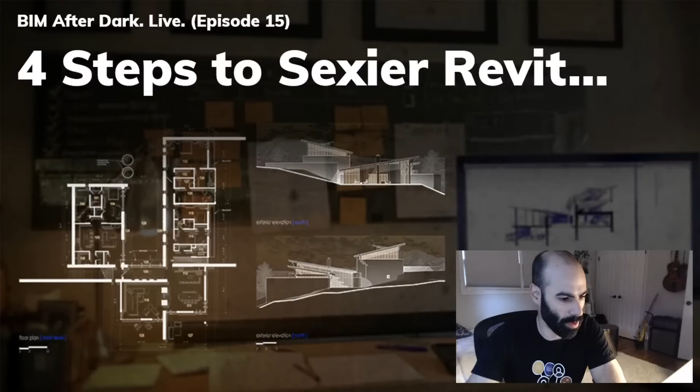So just to run through what we're going to talk about in this session. I have a presentation here, it is laid out, but I urge you guys to ask questions in between. I can flip out and do demonstrations and all kinds of good stuff in between, so don't let that fool you. I just wanted to make sure I prepared the content, and there's some really cool slides in here, so I wanted to show them.

So first I'm going to talk about my journey. One of the more important things, I think, not just with presentations but with Revit itself, is to show people that myself and the gurus out there, those of us teaching Revit, we all started where you are today. If you're a beginner, intermediate, whatever, we've all been there before. It's important to show, through examples or stories, where I was and how it can relate to you, because it makes the level of knowledge or experience obtainable for other people, and it's not like this pie in the sky goal. We all started on the same playing field.

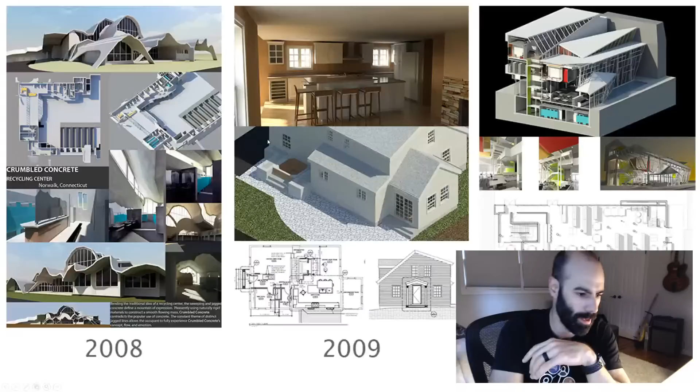Alright, so my head is blocking some of the slide, but that's okay. Maybe I'll make it a little bit smaller so you can see a little better. There we go.

Tuning in from Ontario. What's up, Jeff Davis? Cool, man. Canada, always fun. Always a fun place to be in Canada.

Okay, so here we go. What you see here are a few select projects from when I started learning Revit. Believe it or not, the one all the way on the left-hand side of your screen, labeled 2008, was my very first Revit project for a recycling center at Norwalk Community College. So 12 years ago. It's 2020, so 12 years ago. And what's interesting about this project is not necessarily the renderings.

What you'll notice is that there's a ton of renderings. In 2008, for those of you who are familiar, that's when Revit finally had a built-in ray tracer, a rendering engine built into it. Before this, I was still using AutoCAD to create plans, sections, and elevations, and 3D Max or SketchUp to create 3D models, and then some sort of plugin to render them. The fact that Revit had a built-in rendering engine now was what made me say, oh my goodness, maybe I should try this program. I'm in school, I'm designing things, and I need to make plans, sections, elevations, and renderings. I can do it all in one program.

This is phenomenal. And so, unfortunately, this was the first project I tried to do it in. As you can see, the quality is actually not all that bad. I clearly did a bunch of renderings, so I was so pumped about the fact that it rendered.

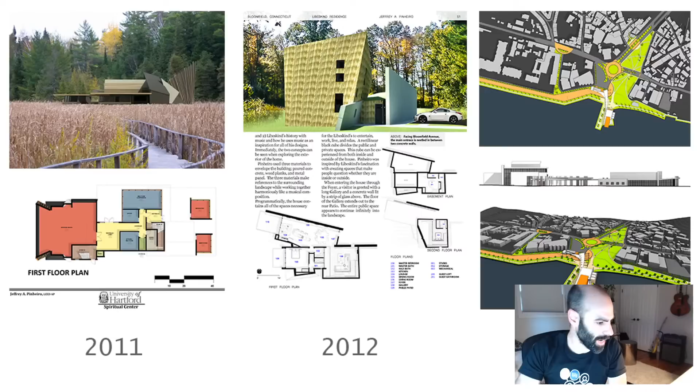So that's 2009. I tried to pick one project a year essentially, which is what you're going to see coming up. You'll notice I started putting shading in the floor plans, and I started doing just a couple less views. One thing with Revit, as you go through it, is you tend to make more views. I'm going to hide my head for a moment so you guys can see this. I'm just going to show the screen.

So now it's 2011, 12, and 13. These are all school projects at the University of Hartford, undergrad projects, and I think 13 was grad school. You can see it's kind of cool on the left-hand side. I started playing around with coloring the floor plans, shading the walls, so poching with shadows. The floor plans start getting a little nicer, a little better looking. And then obviously I started learning Photoshop, so the rendering started coming together a little better. I was trying to superimpose renderings onto images and so on and so forth. This is a spiritual center that I did in Hartford.

2012, this was actually a snippet from a project where we had to make a magazine out of our project. What I thought was kind of cool is I went through an architectural record and started looking at the style of how they presented projects and started playing with that. This is when I actually came up with the 70-50-20 rule, which I'm going to show you guys tonight - the setting I make for what I call architectural record plans, which is what you see here: dark poche, light background lines, nice shading, and using numbers and stuff like that for the room.

And then on the right-hand side in 2013, this was a master planning project. I started playing with shaded views and different ways to mess with phasing and how you can show that. You can see the topography is dark where it's not new, and it's got this sort of more vibrant look.

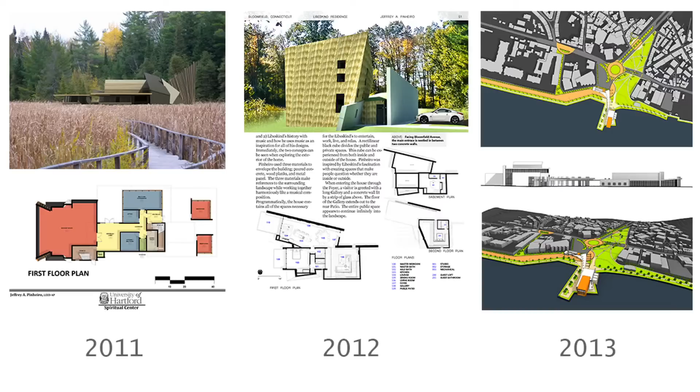PowerPoint, but I'm actually in the streaming program. So sorry, there we go.

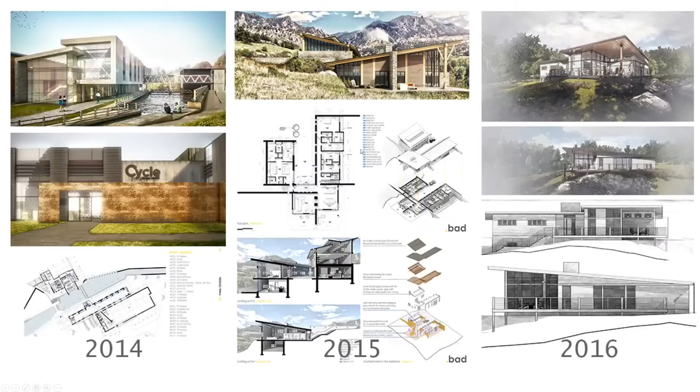Now 2014 and 15, these are my senior thesis, or my graduate thesis, and residential work kind of starting to come into play. What you'll see in 2014 is this is actually my thesis project, which actually might have been 13 - I don't know why I put 14 here - but either way, this was when I started really focusing on rendering, and I actually taught myself 3D Max and V-Ray from a Revit model. So the process from Revit to 3D Max to V-Ray, really just to understand what is so special about V-Ray, and try to get a sense of: can I recreate those things in Revit?

What's really cool is the one on the left-hand side in 2014 - the top one is actually, both of those are V-Ray renderings in 3D Max. But then the one in the middle here, the house, the Rocky Mountain house, that's actually Revit. So what you'll see is I took what I learned in V-Ray and tried my best to apply it to Revit in the post-processing process and so on and so forth.

You could also see in the middle here, the Rocky Mountain house, 2015 - the plans started getting really, really nice. I started playing with exploded axons, which I have a ton of videos on in the channel and on my website if you want to look at it, section perspectives, etc.

2016, some of the residential work that I've done. You can see I'm playing with some different filters in post-processing. I'm still using the same shading effects in Revit, but now afterwards I might be running them through some sketchy filters and some different things to add a little depth. The renderings here are actually done in Lumion, so I'm starting to now play with real-time rendering.

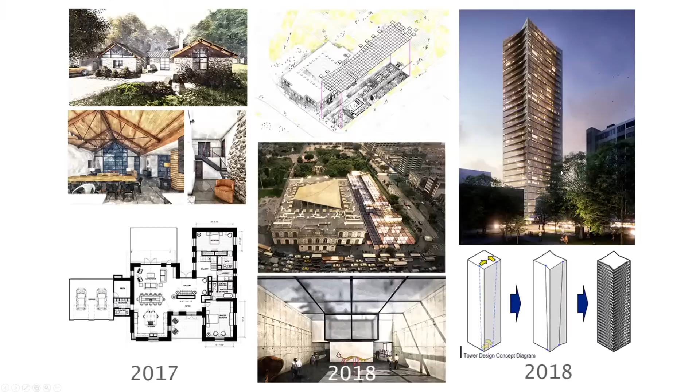Now 17, 18, another one in 18. This is when I think the tables turned a little bit for me as far as presentation, and I thought they started really coming to the next level, partly with the help of Lumion. So most of, actually all of the renderings on this page are Lumion, and all the orthographic views, including the diagram, those are all Revit views. But you can see I'm starting to play with different filters. The nice thing about Lumion is you're not photoshopping stuff anymore.

You're just doing post-processing, so you can spend more time making the scenes and images look great. The tower on the right is kind of cool - there are some techniques I use there to make it look like that. But again, all of these are modeled completely in Revit and rendered in Lumion. So starting to learn there.

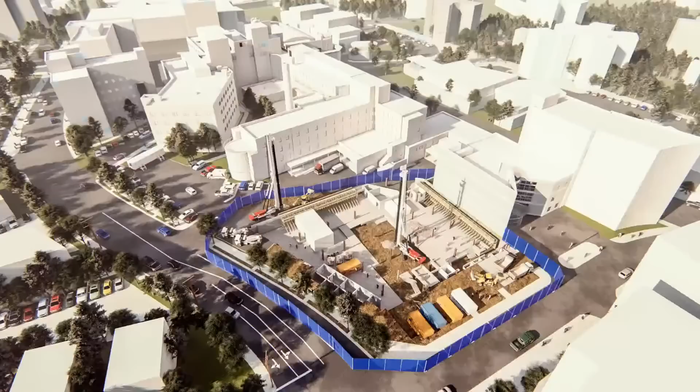I think it's kind of cool to see where I came from and where I took all these skills, and why it's important to look back on those things - but also to show you that the progression of what I've done is something anyone can achieve.

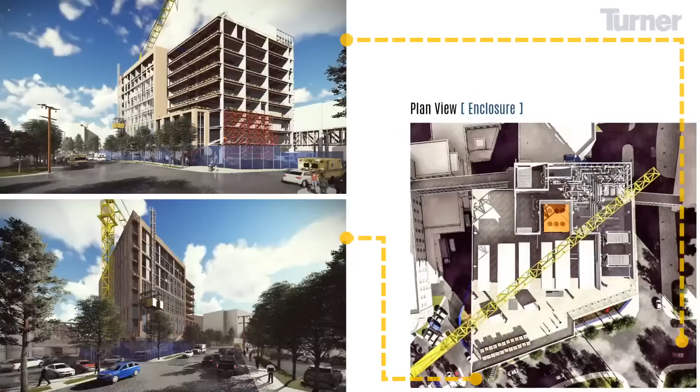And then of course some of the more recent things - some of you have seen these images and videos in other presentations where I talked about construction. I've taken those same skills and applied them now to construction visuals and communication on the execution of jobs, using Lumion, using different techniques, and of course into videos. You guys have seen some of the cool video stuff I've done.

So I guess I can bring myself back so you're not staring at a screen anymore. Hey! So pretty cool, I think.

I hope that was helpful for you guys to see that journey. For me, it's always fun to look back and see the progression. It's always nice - and you should do this for yourself too - when you can start seeing and realizing that you make progress, because when you're in the tunnel and charging ahead, you tend to not look back. But I want you to see that progression. That's my journey from 2008 till now.

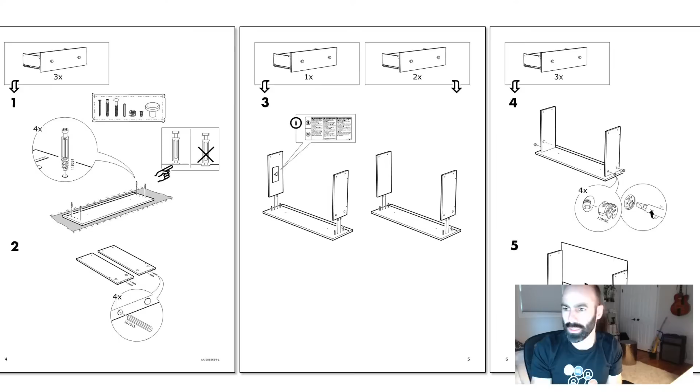There's just 3 axonometric or isometric views, and you know exactly what you're supposed to do, right? Think about Legos. I have a now 5-year-old nephew, he just turned 5, and he's been putting Legos together since he was 4 years old. Think about that.

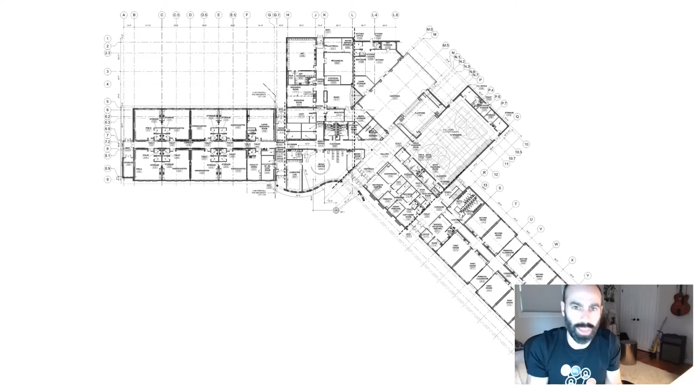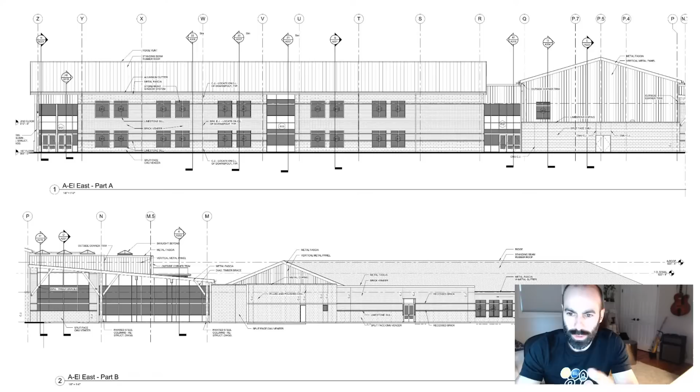My whole thing with making presentations and graphics look better is not necessarily just about looking sexy, though obviously you want things to look better. In my opinion, people pay attention more when things look better. But you also want your intent to be understood. These are fine elevations, and I'll take full responsibility, this is a project I designed, but we make these because we have to. Why can't we think about our projects like IKEA instructions?

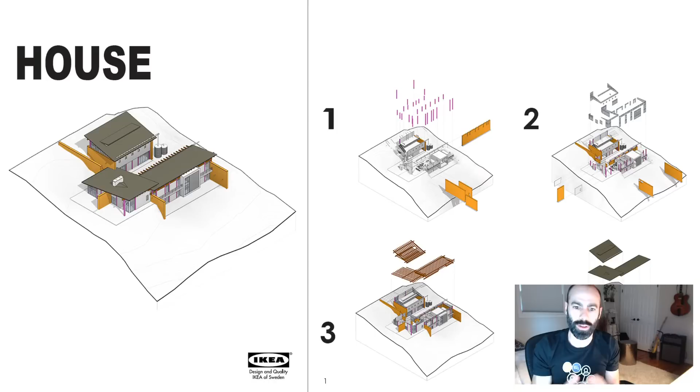Let's start putting axons and diagrams and 3D views in our documents, in the drawings. Remember, we have a 3D model. So my hope... oh wait, I missed something here, I forgot about the Allen key and the little safety man. But to be honest, when you start looking at these images and breaking down structure and walls and pulling axons and all this stuff, it makes sense, right?

You don't have to, maybe there are reasons for floor plans, sections, elevations, I understand that. But start breaking out of the box and thinking cleverly about how to best portray your design intent to the person building it. I spend a lot of time portraying design intent to my team because a lot of it gets lost in the sauce, whether it's having them access the models visually or making diagrams that explain the model.

I don't want to go down the rabbit hole of contracts, so if I see any comments about contracts, I won't go there. But I do want you guys to think about it. This is why I think it's important to think not just in terms of producing construction documents, but how you can change that process, how you can use these tools and techniques to do that.

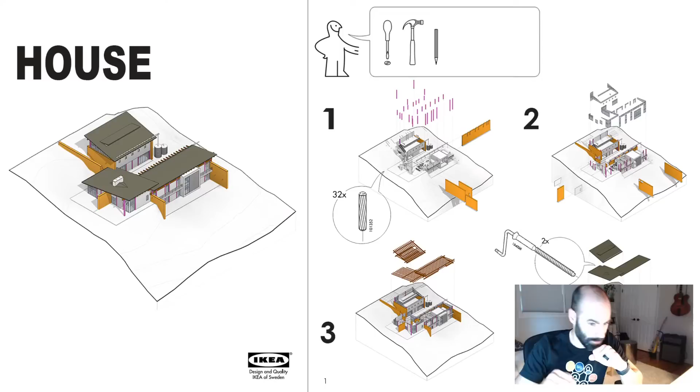Scour, hey man, how you doing? Scour's been here every week, I think.

Our industry hasn't really changed. Yes, I do wish the model was the norm too. The hardest thing in drawings is to take complex and make it simple to understand—exactly my point. Sometimes things are just really difficult to show in two-dimensional views. There's no reason you can't draw a wall section, because in theory that may give you the best information for building it, but why can't you have a three-dimensional blow-up axon of that same wall section next to it? We're already modeling it, it doesn't take much more effort, and now your design intent is moving forward.

Somebody said that means more hours for staff and direct expense to the project. I disagree with that. I would argue that it takes a hell of a lot more time to put together that set of construction documents than it does to put together three-dimensional views that actually explain it. So I don't fully agree with that.

Plus, if you're using Revit, you are already doing the modeling, and it's not that much more effort. So, and then, sorry, I'm just reading some of the comments to make sure.

Architectural diagrams are a must. Awesome. Cool, well, it looks like I struck a chord with some of you, which is awesome. That's what I like to hear.

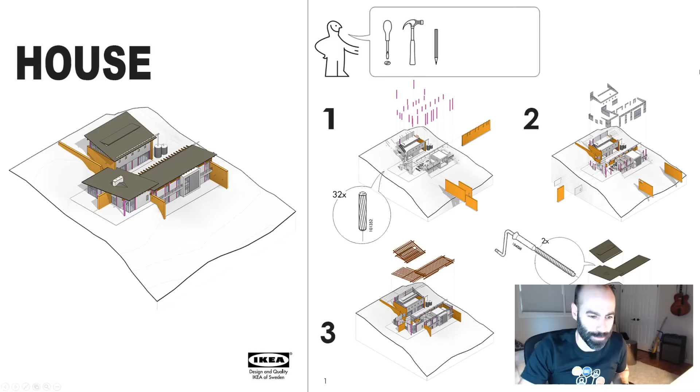I'm a firm believer, and as an architect myself, that we should eliminate construction documents as much as possible. I'm hoping that in my lifetime we build from models and we build from 3D objects.

Okay, alright. Roberto just asked about custom materials. We'll talk about that in here a little bit. I'm not sure if I'll be able to answer it completely, but we'll head back to it in a second.

Let's see, Ryan just said putting a house together with 32 dowels, impressive. I know, man, I know. And let me tell you, those dowels, when you break one, you usually don't have extras. I found myself digging out dowels all the time on those projects.

Actually, Chris Blood made a really good point before I move into the first step: how young and old are you? I see 3D from 2D. So I guess you're asking me how old I am, which, whatever. I'm going to be 32 in August.

But you made a really good point, because there's a stat I cannot find. If someone can find it, please post it in the chat, who said it or where it came from. I remember it being said maybe in a conference or presentation, but it's something like 2 or 3 or 5% of the population can look at a floor plan and understand what it means in 3 dimensions. We're architects, engineers, contractors. We spend every day of our lives looking at plans and turning them into 3D. So we're probably in the percentage that can. Most of the population cannot.

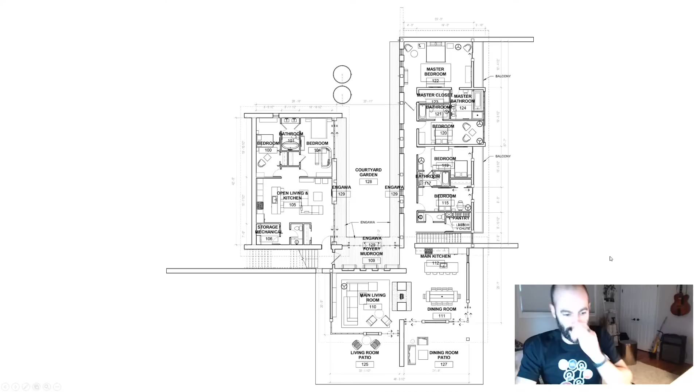The first step is really adding depth and shading to your orthographic view, so to speak. Right here is a floor plan. This is probably what your floor plan looks like immediately out of the box with Revit. There's some dimensions, you can see these crazy room tags that came in with it. This is probably what you've seen on most projects right off the bat. This is out of the box. But then adding a couple of small setting changes, this is what they can look like.

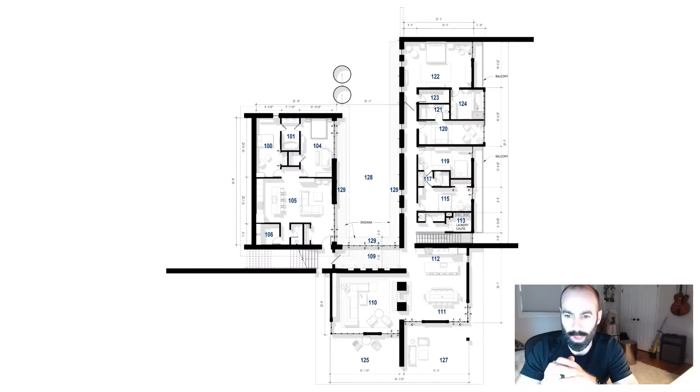So this is me applying what I call the 70-50-20 rule. I actually have not talked about the 70-50-20 rule in a public forum like this, only in my courses. So this is the first time I'm doing it, but it's something I've been doing for many, many years. It's really simple, but it's just a way to remember some of the settings.

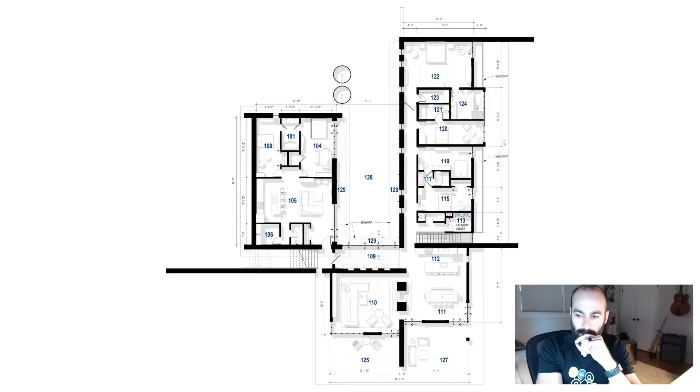So you'll notice, let me go before and after again. Here was before, here was after. A few things happening here: obviously I'm adding poché to the walls, turning on shadows, and changing some of the settings as far as the shadows are concerned. And then this is the architectural record style I was talking about, so I'm doing numbers instead of room names, and then some sort of legend to the side.

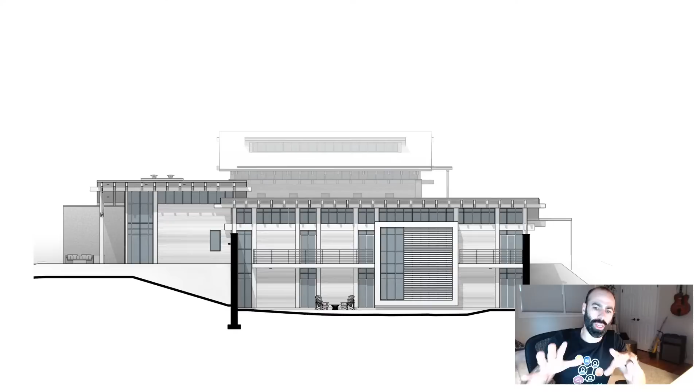But you can see immediately, adding some of the shading and depth changes everything. I mean, the difference between this and this. And I don't understand why this cannot be part of the construction document set. There's absolutely no reason why an elevation that looks like this, with some notes and levels, can't be part of it.

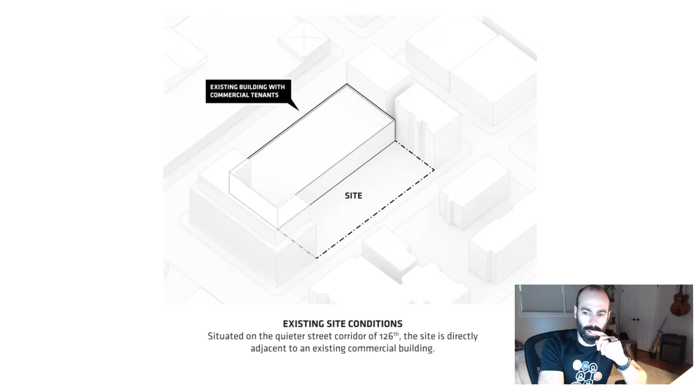So the other area you can utilize the 70-50-20 rule in, and this is a Bjarke Ingels diagram, I know that off the bat, everyone probably knows that, but diagrams are huge. And somebody mentioned diagrams for explaining your design, parti diagrams, etc., etc.

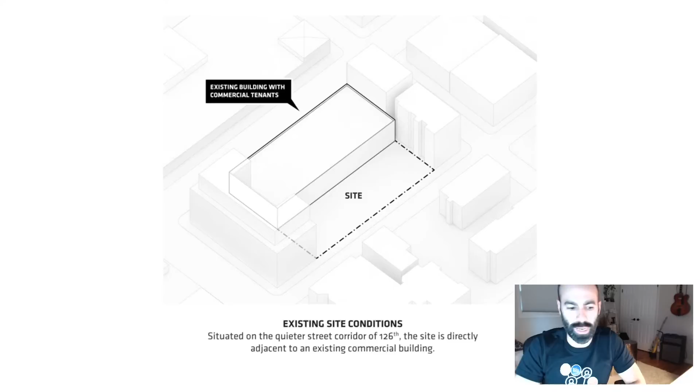You can make these in Revit. This is actually where I got the idea of the 70-50-20 rule, trying to make graphics like this, which most people would say are made in Rhino, Grasshopper, or Illustrator, but instead make them in Revit.

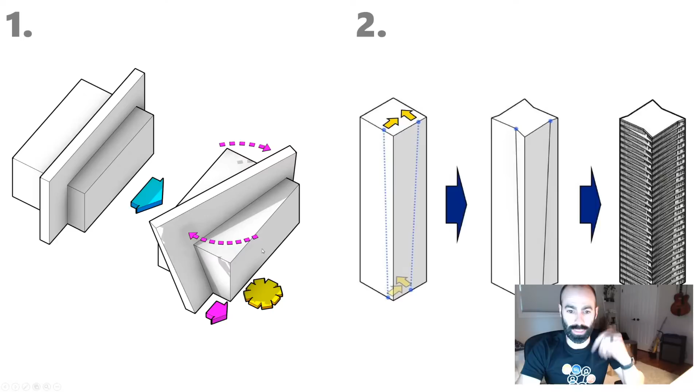So what you're seeing here are actually graphics made directly in Revit. These are image exports directly from Revit using the 70-50-20 rule. In fact, I have a tutorial on the blog and this channel - look up making big diagrams in Revit, and this exact example is there showing the 70-50-20 rule being applied.

So what is the 70-50-20 rule? Here's that same project, and this is a typical default 3D view. You'll notice it's got some different things going on - jagged lines, no shading, no options.

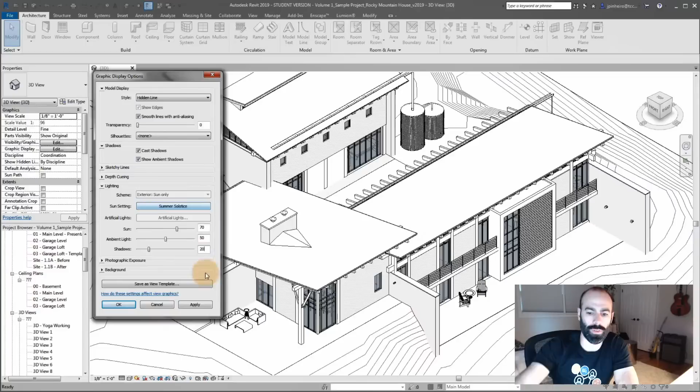So the first thing I do is turn on anti-aliasing. For those who don't know, it smooths your edges and makes it look more like a vector drawing. I turn on shadows, ambient shadows, set your sunlight to what you need, and then I do 70-50-20. If you like lighter shadows, you can do 70-50-15 - sunlight at 70, ambient light at 50, and shadows at 20.

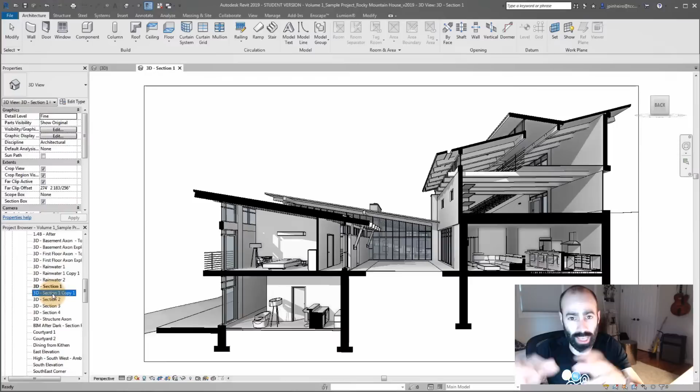You can see when you apply it to sections - here I'm just adding poche for my fill and applying that. You notice how it gives that ambient shadow, creating shadows from your ambient light, so corners have this nice gradient to them. Adding the shadows, using 20 or 15, lightens them up. By default, Revit shadows are at like 50, and they're super dark and super ugly.

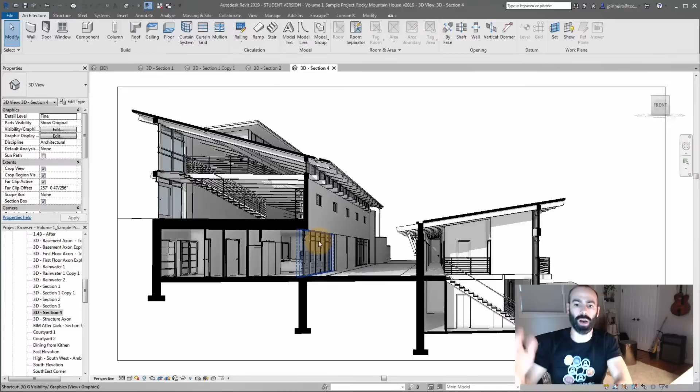So I would definitely check it out. That's the 70-50-20 rule. I go into extreme depth on it in one of my courses.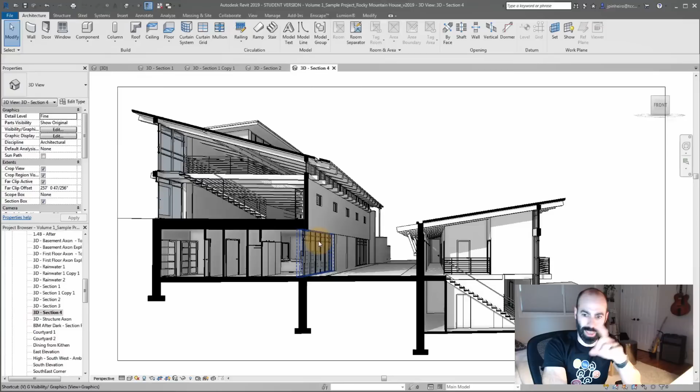But I wanted to show you guys the 70-50-20 rule. Right off the bat, the first thing you can do is start adding depth and shadows using the 70-50-20 rule in your views. Pretty sweet.

Before I jump out of that, somebody mentioned contractors will paint your shadows if you do that. No, that's not the case. I'll tell you one thing - working for a contractor now for 5 or 6 years, I've learned they're not as dumb as we architects think. We're always looking at contractors thinking they're dumb nail-hammer-hit guys, but they're actually very, very smart. So yes, things like that happen, I understand. But if you keep it at 20 and make it a nice light shadow, no one's going to ask that question - plus you can tell it's a shadow.

If the elevation is rastered, I don't see why a raster can't be in the construction documents. Josh mentioned rastering the image - yes, if you put shadows on it, it rasters them. But from experience, most of your construction documents are becoming rasterized by the end users anyway. And if they don't print well, get a better printer - I mean, really, use laser printers. Come on.

Okay, so step 2 is using custom materials. When it comes to your renderings, the last thing you want to do is use that default red brick - you want to use custom materials.

So what I have here is a materials board for that Rocky Mountain house. You can see on the top - these are the seamless textures that I used for it. And the bottom is just pictures of the site.

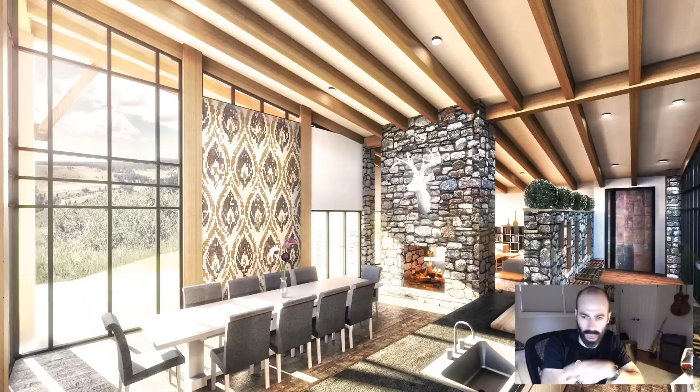A couple more images showing everything in the scene is basically a custom material. This whole rendering, again these are Revit 2015, rendered native Revit, just to give you a sense of what you can do if you needed to.

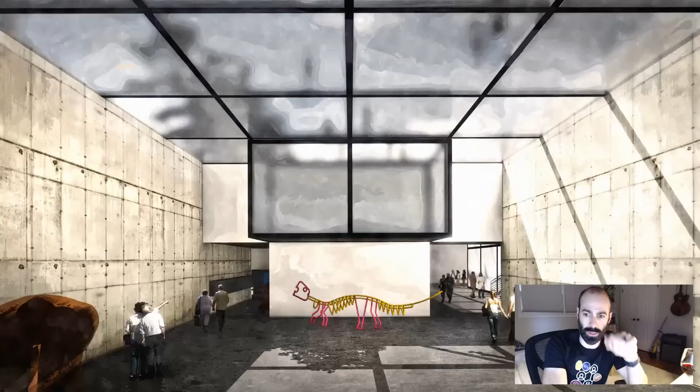Someone just asked where those renderings were made. All these renderings I'm showing you right now are native Revit renderings, actually made in 2015. This one right here is Lumion, so it still applies.

You want to use custom materials that will actually go with your design. So here's a museum exhibit, and you can see there's not a lot of custom materials, but there's a frosted glass, a concrete wall, a concrete floor, and then a nice plain white drywall sort of texture. But all of that makes the scene, that's what makes your image. If I just used a default concrete and a default floor that was in the program, they would not look the way they look here.

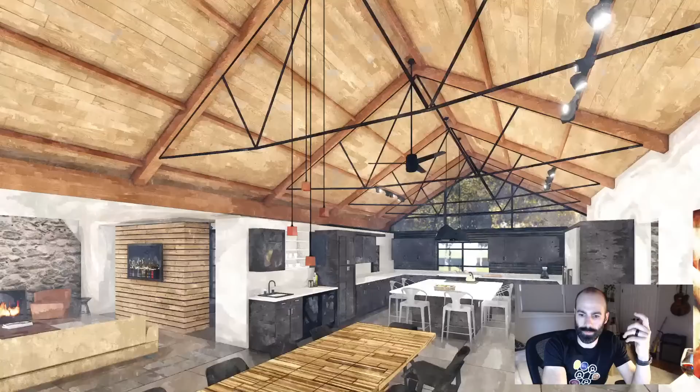Another few examples, here's a residential project. This is also a Lumion rendering. You can see the wood ceiling, the concrete floors, the wood. I'm not a huge fan of the wood table that I did there, I should probably change that one day. The wood centerpiece there.

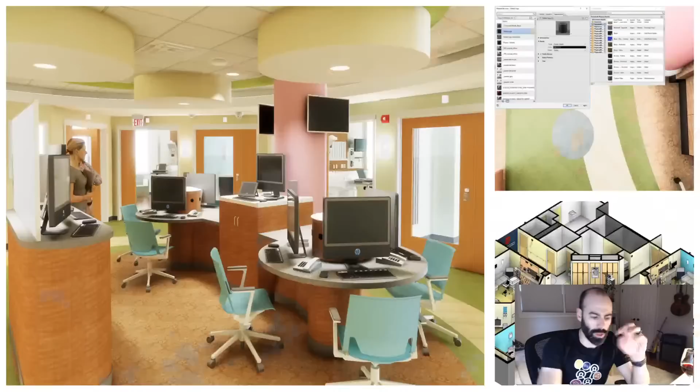Everything in here is custom materials, so the custom textures are massive. Even here, these are some of those Enscape renderings that I'll show in a little while. If you saw my Enscape session, I don't remember when it was, but I'll link it in the comments. Wood makes everything nice - yes, wood is a nice warm material, right?

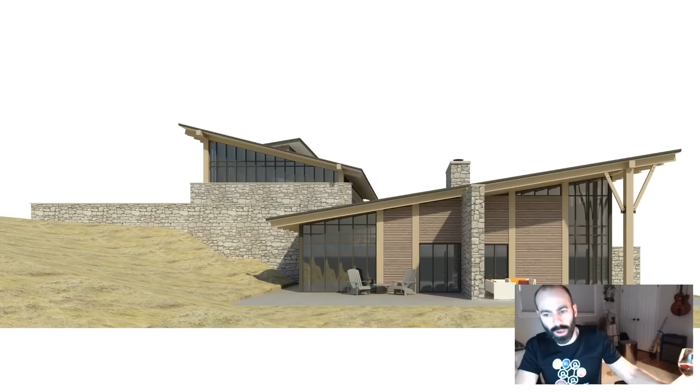So here's actually the same project. This was back in 2015, and this is actually the native Revit project. Oh man, the wine's not doing it for me tonight. I'm trying out. So this was before, and this was after.

So this is a little unique because I'm also putting in a background, right, which helps with the realism. But there are a lot of things that are happening beyond just the background. And so if you're using Lumion or Twinmotion, what you'll see in any of my tutorials and live sessions about those programs is that you don't have to Photoshop in the background for the most part, you can build your scene, right? So that's nice. This one I actually Photoshopped in the background, but I am enhancing the colors, the vibrance.

The contrast, the detail, the shadows, the highlights, I'm doing all of that in Photoshop. And one of the things that I do is I have a 10-minute Photoshop post-processing technique. If you are interested in checking it out, go to live.bimafterdark.com, and you'll see the episode, man, I can't believe it's been that long ago, wild, from May 8th. It's called Photoshop for Architects. I don't even know what episode it was at that time, but I'll post the link right here for you guys. So I went deep into the process that I use there.

What I wanted to show you in this quick video is how post-processing affects the original image. So I'll turn off the post-processing completely, without the background image there. Turning the background image on still looks pretty good, but notice the difference with post-processing. It's subtle, mostly color corrections and stuff like that.

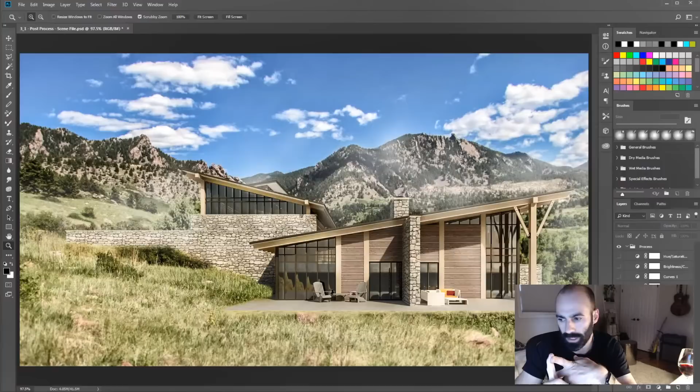I'm going to go through each layer here. You'll see I do hue and saturation, brightness, contrast, curves, levels. I added smoke in there, and I do a little technique where I can add some distance fog. I also have a technique where you enhance the shadows and highlights using alpha channels, which I cover in my Photoshop class. Then I use the Camera Raw Filter, which is the coolest thing in Photoshop ever, so definitely do that. It makes a huge difference, as you saw, and I think it just completes it there.

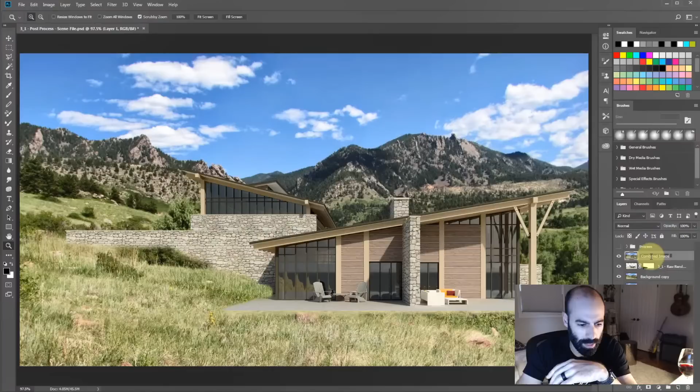Makes a huge difference, and whatever you do from now on, whenever you create an export from Revit—whether it's a rendering or exporting to something else—do me a favor and make sure you always spend a little time in Photoshop, GIMP, or some kind of photo editor, okay?

Step 4, okay? When it comes to renderings, step 4 is: do yourself a favor and look into real-time rendering programs. If you are still rendering using the teapot in Revit, stop it. You just don't need to be there anymore, okay? The programs out there now are so good, and the quality is equivalent to, if not better than, what's coming out of native Revit. Don't even spend time there, okay?

So check out the programs. I'm going to run through a few of them—I've obviously gone through a bunch of them in the last six months here on this show. Real-time rendering is changing the way we render things, okay? I don't even believe rendering really... I can't remember the last time... Actually, that 2015 project was probably the last time I actually used the native Revit rendering engine.

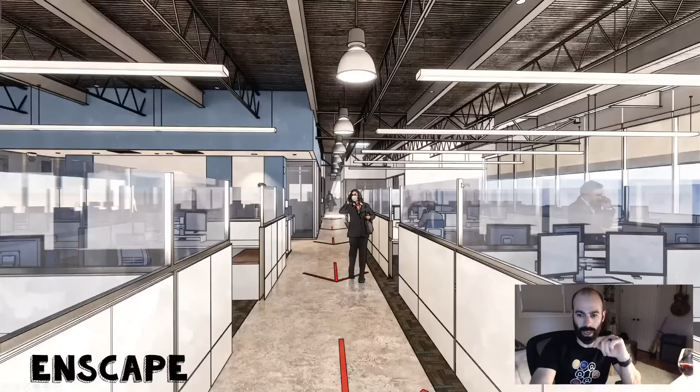First one I'm going to talk about quickly is Enscape. I did an entire episode on Enscape. Here's some renderings of an office renovation recently for COVID. You can see some of the glass and stuff like that. The nice thing about Enscape is that it sits on top of Revit, and the lighting for interiors and stuff like that—this image has no post-processing. This is just straight out of Enscape. The lighting looks phenomenal for interiors.

This is a little warm—I know some people don't like it this warm—but this is basically just opening up Enscape in my Revit view and pumping this out. Notice the custom materials: the floor has custom materials, the walls even have some custom materials, the curtain, etc.

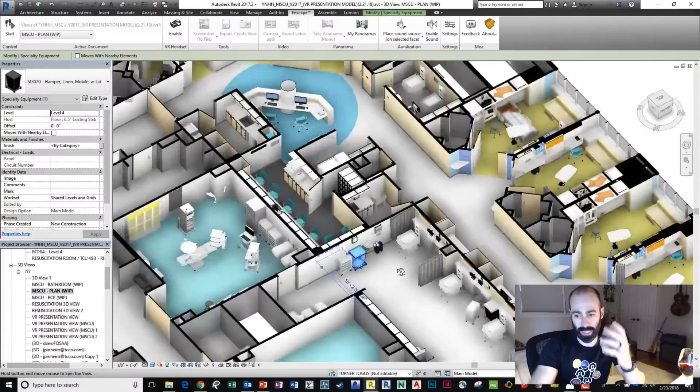As I mentioned before, Enscape sits directly on top of Revit. I think a couple episodes ago I did Enscape comparing to Twinmotion for a healthcare project, so check that out if you want, it's pretty cool. This is just showing you the quality of what you can create using out-of-the-box Enscape with Revit, which is pretty sweet.

This is what it looks like live if you're not making renderings, just to give you a sense of the quality without any post-processing. In Enscape, you still want to do your typical Revit materials, as if you were making a rendering in native Revit—still do the textures, the bump maps, and you can even start looking into reflection maps and all that good stuff, okay?

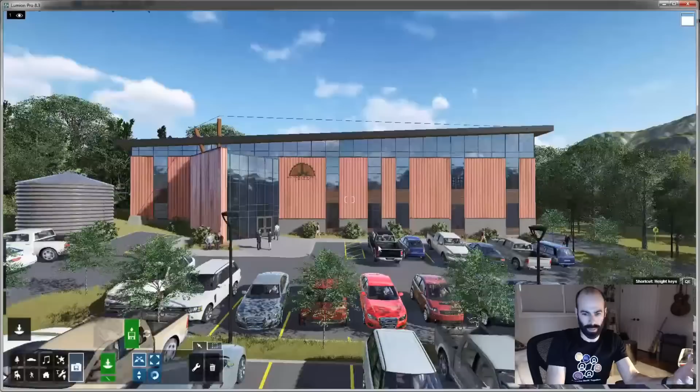Lumion is another one. Again, one of the greatest things—Enscape is getting there, starting to build a library—but one of the great things about Lumion and Twinmotion, the next two I'm going to show, is that you can build your entire world. Here's the rendering, one of the final renderings, but the scene looks like this. I built this world, and I'm just taking pictures of it. That's what's really cool—you don't have that part of post-processing where you're putting it in and trying to match it with a photo and all that crazy stuff. You can make images, and all your Photoshop and post-processing is really just color correction, okay?

Another example: one of the things about using Lumion as opposed to Twinmotion or Enscape is that Lumion relies on some heavy-duty things called effects. Effects are kind of Lumion's way of post-processing before it's fully processed. Lumion does a little bit of ray tracing—it's not full true real-time in my eyes. So here's a typical Lumion camera view image without any effects applied, and here's one with effects applied, before photoshopping. You can see this is a pretty cool rendering.

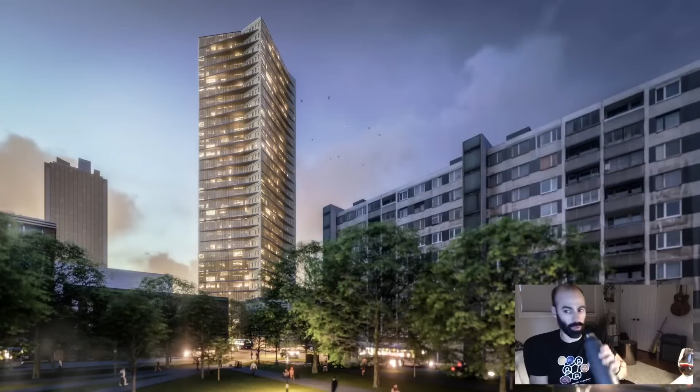So some of the effects I use for that scene, I'm going to show you here. Here's that building, here's that little scene. I'm just going to run through it a little bit. I'm going to jump into my cameras, and you can see depth of field, chromatic aberrations, shadows, skylight.

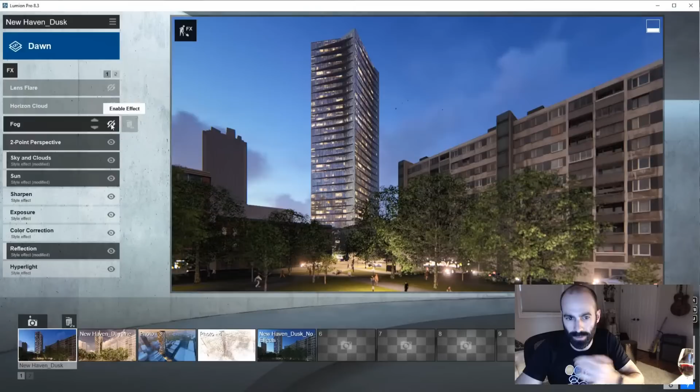So those are all a bunch of different random things for Lumion. Then I'm turning on hyperlight, which is like global illumination, increasing reflection, changing the color correction, changing the exposure, adding some sharpness, modifying the sun so it's nighttime, modifying the sky, adding 2-point perspective, adding some fog, adding some more fog, and then adding some lens flare. And now you'll notice, just by adding those series of effects, what's coming out of Lumion is almost picture perfect. You barely need to post-process it.

So super cool, super powerful. And notice I don't need to do a single thing about the trees, etc., etc.

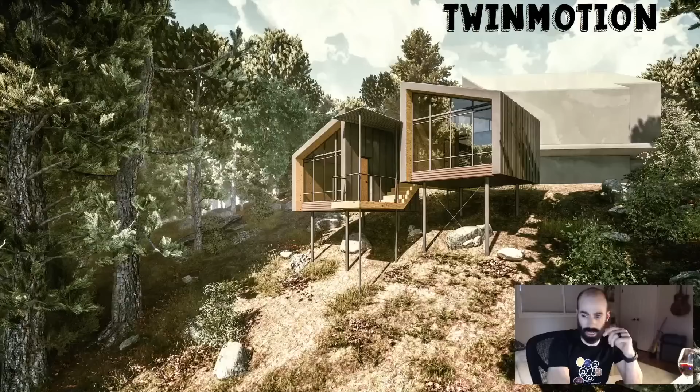And then the last real-time rendering program you should definitely look into is Twinmotion, which I've been getting into more. And here again is the final rendering. Remember the trees, the plants, the cars, people, all those things you don't have to Photoshop in, which is one of the coolest parts about it, right?

The scene itself looks something like this. And you can see there's my live model. All the trees are already there. The lighting, the fog, the ambiance, everything is already there. And so there's my model, me moving around live.

Huge advantage. Definitely, if you have not tried any of these real-time softwares, jump into them and try them out. They are game changers as far as I'm concerned, and they will dramatically improve your workflow.

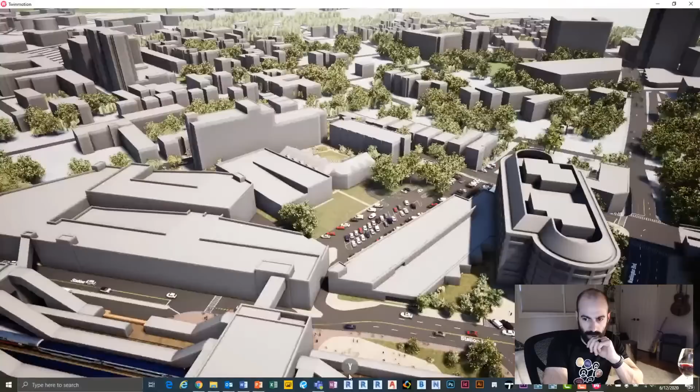Sort of taking it to the next level, where I think these programs are going to help us is — remember I said in the very beginning that I think we're marching our way towards model-based construction documents per se. So what we're doing actually now at Turner is we're creating full live model logistics plans. We're actually showing clients, our subcontractors, and our team how we're going to build their buildings live now. And that's where these real-time programs come into play.

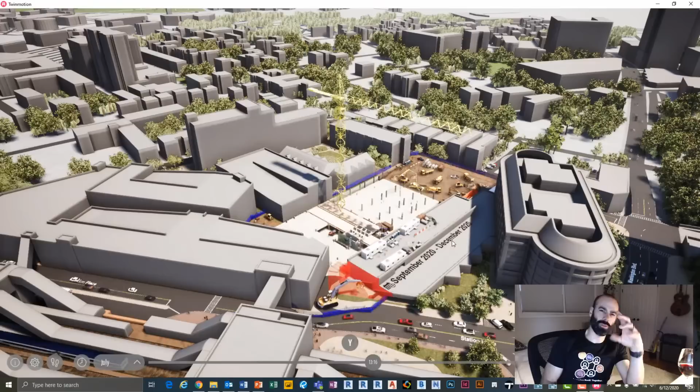You have the ability now. Remember, those renderings and those videos are just snapshots of our scene. So why not give people access to the entire scene? Pretty cool, pretty powerful, pretty sweet. Definitely something you guys should look into.